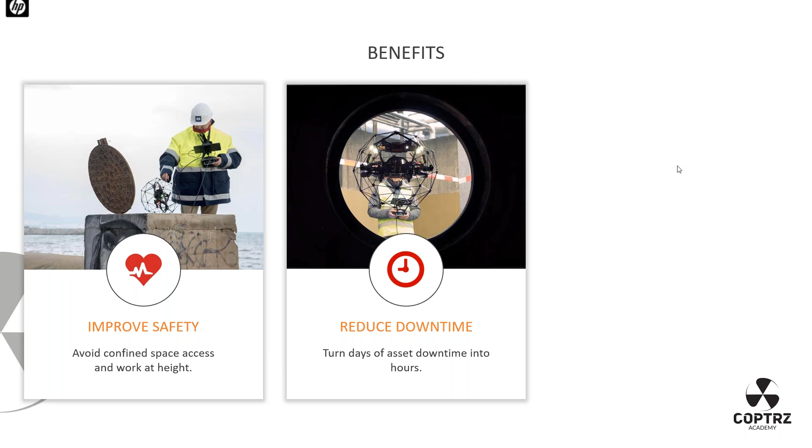So for all those of you trying to build a business case out there for this kind of technology, do not hesitate to reach out to myself or George. We have numbers, we can show them to you in terms of the case studies and how companies have benefited in terms of reduced downtime.

Last but certainly not least is the lower cost. Here we're not just talking about operating costs anymore, but we're talking about the capital expenditures related to things like scaffolding an entire boiler, for instance, or the inside of a chimney. Just think about that particular cost point. On top of that, you have to consider how much lower the premium on insurance risk would go if you can actually demonstrate that you don't need to put humans inside this confined space structure.

So it's really a trifecta of benefits that make this value proposition really universal inside a company, whether you're pitching it to the health and safety people, to the operations management people, or to the CFO.

Absolutely, I think especially in the current climate, companies are looking for cheaper, better alternatives, and safer is always the key point at the moment. So it really does hammer home that the lower cost, reduced downtime, and improved safety are key talking points for business cases.

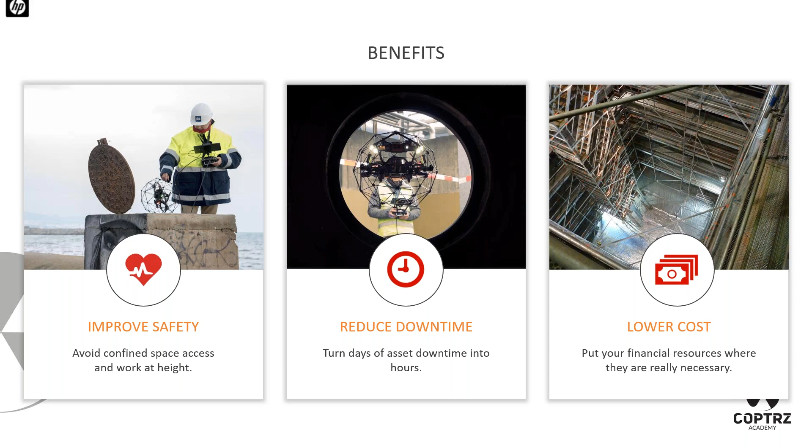I think you raised an excellent point, George. Especially with the price of crude, the WTI at these levels, companies must look into any possible means to reduce the cost of inspecting, for instance, storage tanks, assuming that there are any empty at this stage. And ELIOS has really become the go-to choice for a large number of refineries around the world. Absolutely.

So we've been working on this presentation for quite a while, and I still find the hierarchy of hazard controls to be the best way to explain the value of ELIOS. This is even more relevant, I think, when talking in a country like the United Kingdom, with common law and especially the duty of care concept, which is not something you find necessarily in all other legislation, but I'm sure all of you are familiar with it. It's such a neat and straightforward way to explain why this product is really a no-brainer when you start looking at it from a point of view of risks and risk management.

So I'm sure most of you are familiar with the inverted pyramid, and essentially you go from top to bottom, from the most effective to the least effective. If we can just move to the next slide, you will realize, and probably accept as a matter of fact, that the majority of confined spaces works at the moment only really rely on the bottom two elements to perform this kind of inspections.

So either change the way people work through new procedures - for instance, hot work permits or confined spaces entry permits - or really the only remedy that people have for avoiding dropped objects from a railing or from scaffolding is to use PPE. But that's just not enough, both in terms of the duty of care of the employer and in general, considering the technological alternatives that are out there. So suddenly, when we start thinking outside of these terms, outside of the status quo, outside of 'oh, but we've always done it this way' or 'the procedures dictate that we do it this way,' there are other options.

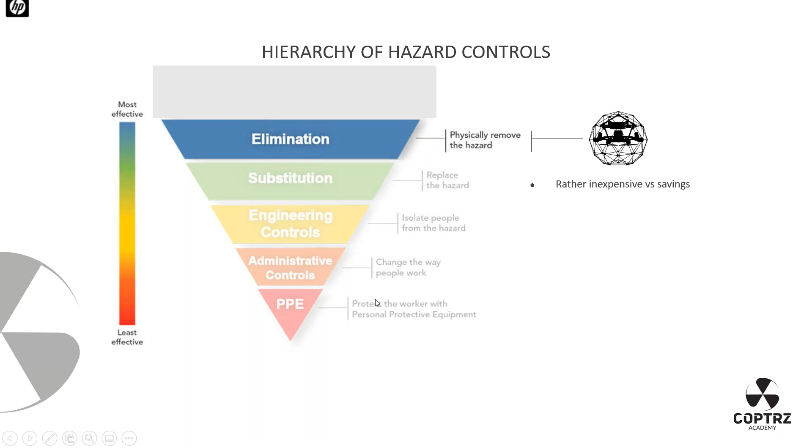So just some key points, and I think we will move on to some of the industries. Junior, if you just want to go through a couple of these, that'd be brilliant.

Thank you, George. Yes, so oil and gas - it's very much our bread and butter in the UK. It definitely represents the largest portion of the markets that we cover with Coptrz. I basically lived in Aberdeen for part of the year last year during the roadshow, and definitely we have some very big ambassadors in this industry, mostly from the point of view of inspection companies like RaptorUAS. We tend to work mostly as a tier 2 or tier 3 supplier, just because of the way the industry is structured through these layers of contractors and subcontractors. In no small part, thanks to the work of George and his team, we started to make strides also in power generation.

Surprisingly, not as much in nuclear, but more on the coal side of things. Nuclear power generation still remains a bit untouched from this kind of evolution or innovation in the UK, whereas, for instance, in Italy, which, as you might gather from my mild accent, is another one of my main markets, we work very closely with Enel, one of the largest power generation companies in the world, using this for boiler inspections inside coal-fired or gas turbines in gas generation. It's really become the state-of-the-art way of performing these inspections.

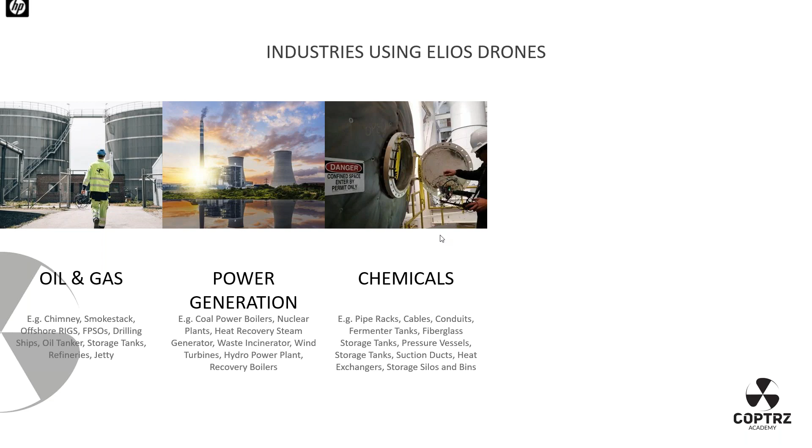Chemicals as well - this is one of our biggest success stories. I'm happy to go more into details later on this, but we essentially managed to turn Dow Chemical from a client to an investor. We became an integral part of their inspection processes, so much so that they actually bought shares in the company to guarantee the future R&D development of new products.

And chemicals in this case doesn't simply mean oil and gas. There's a ton of opportunities, I think, in the UK market for everything related, for instance, to pharma chemicals. And as far as mining is concerned, obviously, UK, maybe we're a couple of hundred years late on this particular part, but I'm sure there's still plenty of abandoned mines or mining operating equipment that could be safely inspected with this particular tool.

Last but not least, we've been very active also on the public safety sector. Obviously, most of these details are confidential, I just want to mention the inspection that we performed on the Liverpool Echo parking lot that burned down. This is available on our website, and it was the very first case that we know of a confined space drone used for a forensic investigation. I was the pilot on that mission, so I'm particularly proud of its outcome, and I encourage you to take a look at it on our website.

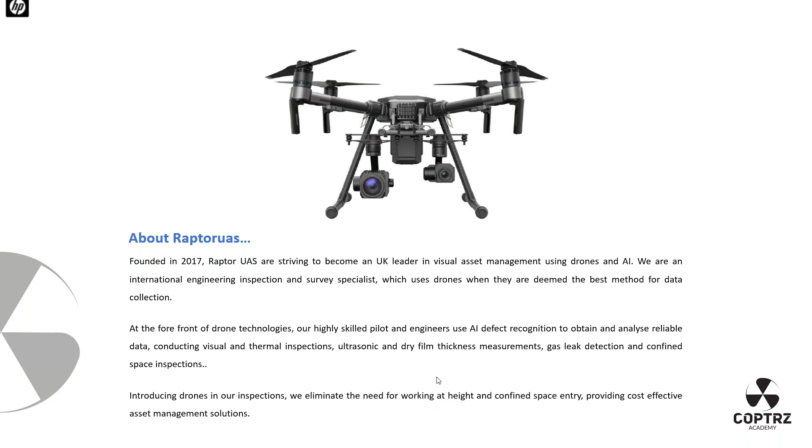Well, I think we have talked about it for cost-effective and safety before. Junior has done it, and also you, George, have mentioned it before. There is a very cost-effective solution to implement those inspections. We have seen about a 60%, depending on the situation, depending on the access, on the different scenarios or premises industries that we are working, but it's about a 60% compared to other access methods such as scaffolding, MEWPs, or rope access inspection.

We have a significant reduction of downtime. We do have a shorter setup and a much faster inspection. So as previously Junior has mentioned, we are talking about reducing inspections from weeks to days. So now anything that we have done, for example, inside tanks, instead of having to build a scaffold for access that will take a few weeks and then do the inspection itself, we are actually collecting all the data with the drone in a few hours on site, and that's done on site.

And after that, we have all the information available to go through and to analyze back at the office. We can perform also multiple assets in a single mobilization, and all this enhances condition monitoring of any assets.

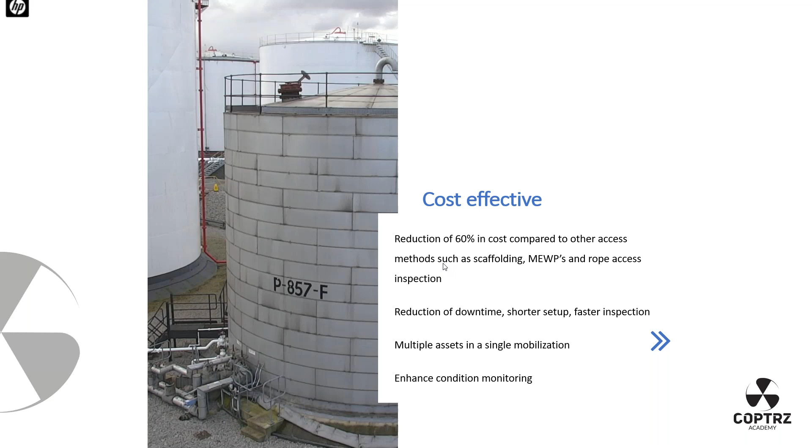From the safety point of view, we definitely reduce and eliminate the working at height needs, any works in scaffolds and rope access. It provides us that safe access to confined spaces, removing the need of confined space entry, and it also allows to maintain a standard distance from the asset.

In this case, for example, the ELIOS 2 was a great improvement from the ELIOS 1 because it has that feature of locking the distance from the asset, so it will never get any closer. And if you set your distance to 300 millimeters, it will just follow the inspection without actually getting in touch with any surface or any equipment that you are inspecting at that moment. So great tool, and great to also operate when there are other personnel or other work in progress.

Yeah, so just touching on that, Anna, the locking of the distances to keep you at a safe distance from what you're actually inspecting. How is that benefiting you for doing reliable, consistent data? Well, first, it makes the inspections much easier to fly, because as soon as you are on the area of concern or the inspection equipment or whatever you want to have a look at, it's much easier to just lock the distance and follow that element.

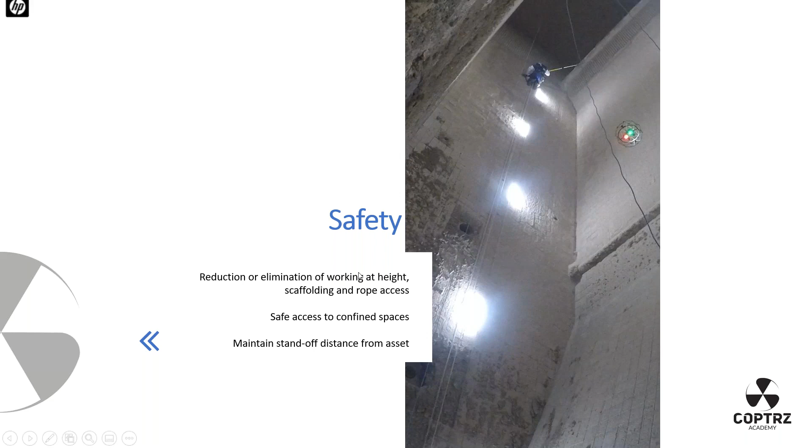So yeah, for tank inspection, I wanted to show how we are using the ELIOS and other drone platforms to carry out confined space inspections. All these photos were taken with the ELIOS 2. So they are on tanks, and we can do basically what I would classify as structural surveys, coating surveys, and

corrosion and insulation inspections. So for the structural surveys, we normally look for cracks, mechanical damages, misalignments, missing objects. During the inspection we mobilize two people as a minimum: a remote pilot who is just controlling the drone, and a person who is reviewing the data, the videos, at the same time. So if anything is flagged during the inspection, we can check it live, maybe do a close-up, or just have more images of

any areas of concern. However, we are still recording, and we have a permanent record which can be reviewed and analyzed afterwards, and provided to the client or any third party for further assessment. Then for coating surveys, we are normally checking for blistering, grades of corrosion or coating failures, and also heavy loss of material thickness, scaling, scabs and different forms of corrosion.

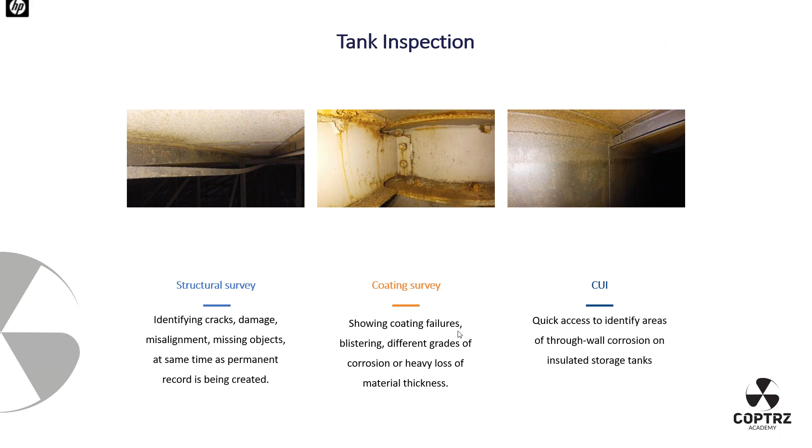For the ELIOS, particularly the ELIOS 2, there are different features that make it more appropriate for inspection in confined spaces. We have the oblique lighting. It was a big problem at the beginning with lighting, because dust in confined spaces doesn't allow you to see anything. That's now sorted on the ELIOS 2 - you can be in a very dusty environment and not see any dust at all, which is great.

On top of that, because of the oblique lighting, you also get some perception of 3D. So you can see details on pitting, defects and cracks, and perform a proper inspection just with the data you collect with the ELIOS 2.

You have 4K video. Most people are quite familiar with the USAF resolution chart - the ELIOS has 30 centimeters from the object, and it falls on element 1, group 1, which is actually a very good resolution. It allows you to check welds and perform welding inspection through the ELIOS.

As mentioned, it has up to 15 minutes flight time, probably about 12 minutes for a good inspection. The amount of data you collect is enormous - for a 35 meter diameter tank, it was about 96 gigabytes, and that's only for roof inspection. We didn't do anything else, just roof inspection, 96 gigabytes.

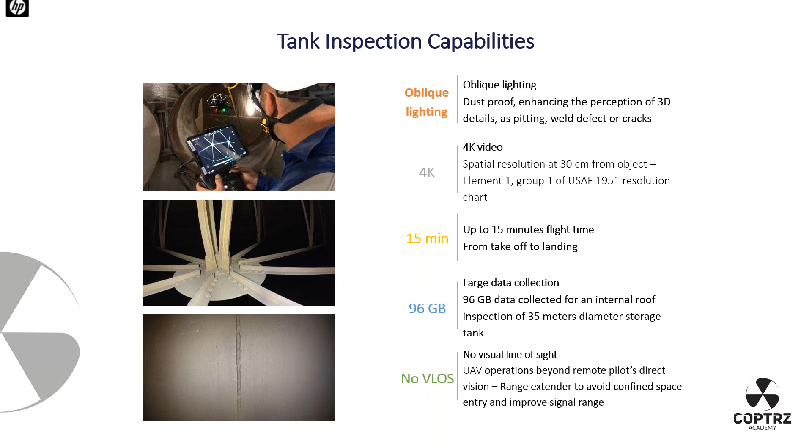Yeah, so for a structural survey, if you can, one more click.

As inspectors, we normally follow recognized international standards. In this case, ISO 17637, the standard for visual inspection of welds, already considers the use of mirrors, borescopes, optic fiber, or cameras when direct inspection is not possible. This brings the ELIOS and drone inspection in general into the picture, because sometimes the question is whether it's compliant to do an inspection with an ELIOS. Yes, it is, because it's already recognized in ISO standards.

The type of damages or findings we normally have on structural surveys are mainly corrosion, missing objects, or potential drop objects, as well as objects left from construction, which I always find funny or interesting, seeing something left there for 50 years and now having access to see it again.

I think we'll see some pictures on the next slide, and then kind of weld defects or other problems. This picture of the weld defect is not our picture, it's something I found very interesting, I think from marine structure inspections, who posted a video on LinkedIn showing a crack or crack-type indication on a weld.

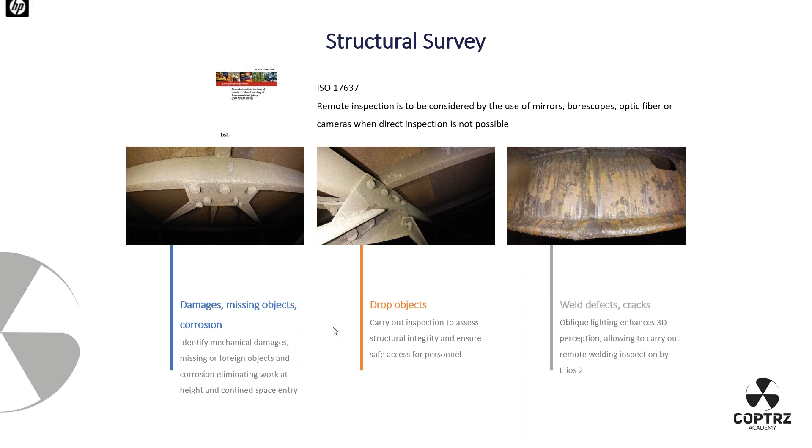Great, thanks. So for coating inspection, we are again doing exactly the same. Instead of direct vision, we are doing the same with drones.

ISO 4628 covers evaluation of degradation of coatings, and it has pictograms, the ones that appear on the bottom of the slide, that you use to compare your survey subject to those pictures, giving you a grading system of how much the coating has degraded, whether for rust, breakdown, or general coating failures.

So we use this together with dry film thickness inspection, and also with low and high voltage holiday detection. We've implemented DFT and holiday detection on our drones also for confined spaces, so we can carry out both types of inspection.

For dry film thickness, it's basically checking the remaining thickness of the coating. For those not familiar with low and high voltage holiday detection, it's basically checking if there are any holes in the coating system. If the coating system isn't closed, you'll always have corrosion developing under it, which is actually quite dangerous and problematic.

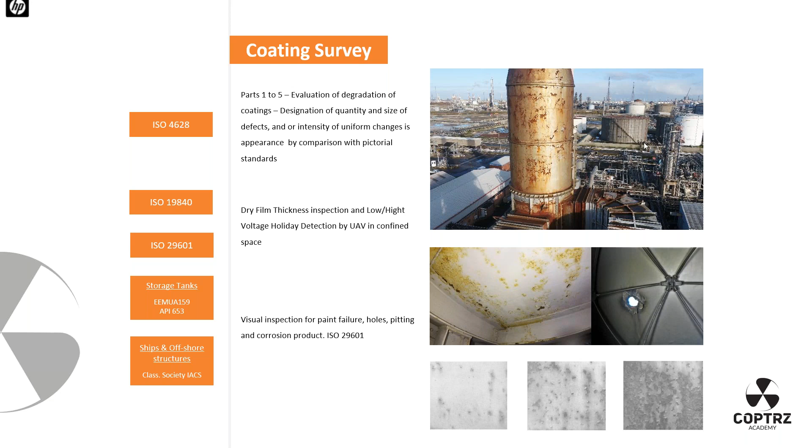Finally, for corrosion under insulation, as we've mentioned briefly before, sometimes clients don't know the condition under the insulation because there's no external access. When they perform an out-of-service inspection, they just want to assess if there are any integrity failures on the shell or the roof.

So what we're offering right now is a combination of different inspection techniques. Thermal inspection can be performed beforehand, while the tank is still in service, to detect any possible water ingress or areas of insulation damage, which are highlighted. Then a further inspection is carried out on those areas of concern.

Once the tank is out of service, a visual inspection can be performed with the ELIOS, covering not only the shell but also the roof structure and any roof plates, along with ultrasonic thickness measurements done both internally and externally on the tank.

Together, this full package offers quick, safe access and doesn't require confined space entry, allowing the client to make informed decisions and schedule maintenance appropriately.

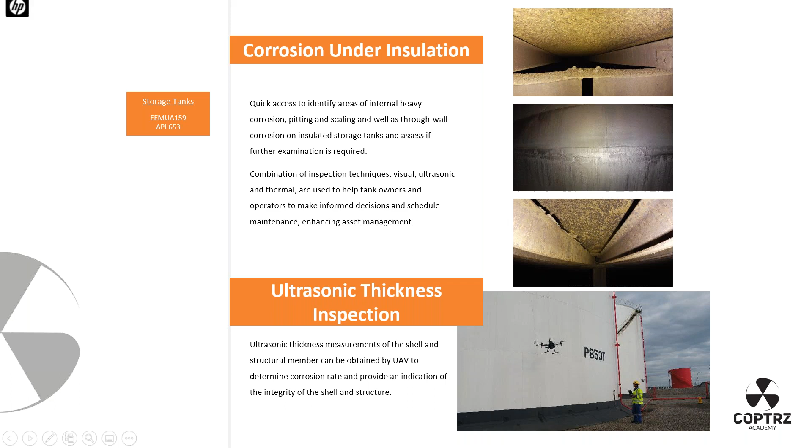This is a tank roof inspection case study. The tank was a 34-meter diameter tank commissioned in 1962. The owner reported some sagging on roof plates, and they had never carried out a roof inspection before, nor had any traceability of previous inspections performed.

As we were already doing drone inspections and the client was trying to introduce drones into routine inspections, they decided to go for an ELIOS internal inspection to assess the condition and check if they needed any further investigation.

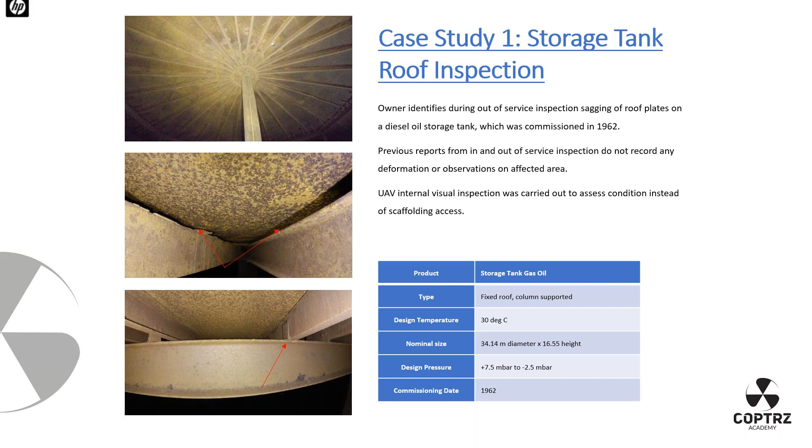So we entered the tank, and what we found - if you can go to the next slide, sorry - were some misalignments, some bolted connections that were actually not bolted, missing fasteners, but there were no problems in the area of concern.

It was just the roof rafter - instead of being connected to the fixing port as it was supposed to, it was simply resting on the ring. So they closed that inspection concern and noted that the structure of the roof is sound, and they can continue operation and bring the tank back into service.

We also found foreign objects, which I mentioned before - it's always interesting and funny when we get in there and see wedges, ropes, or bolts that have been left behind and can now be seen. Most of the time I'd assume that if they couldn't remove it, they said 'just leave it, it doesn't harm anyone.' In most cases we haven't seen them pose a drop object hazard, so they can just be left there.

But at least there's an assessment of the condition of the roof structure, and if there is any real concern, then actions can be taken.

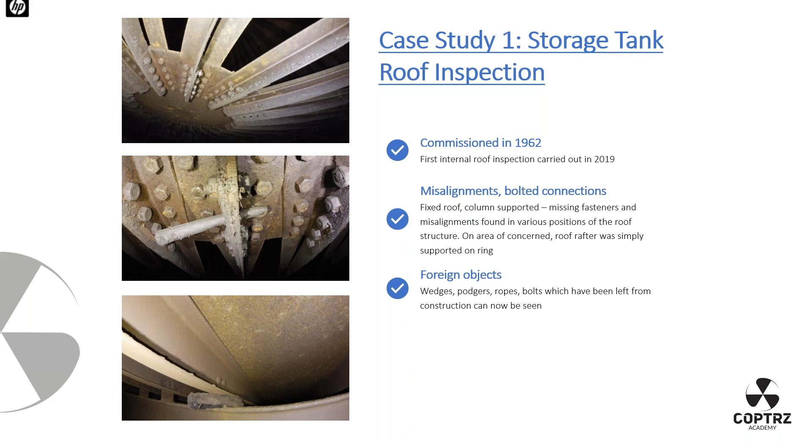For this tank, we had an 80% reduction in confined space entry. We accessed the tank ourselves, but there was no need for scaffolders or inspectors to enter. So it was an 80% reduction in personnel needing confined space entry, and a 90% reduction in timescale.

Instead of building scaffolding and doing a full inspection that would take weeks, we completed a full inspection in a single mobilization within 8 hours, and processed the images afterwards - an 80% reduction in cost. Together with that comes a definite reduction in the timescale for the out-of-service inspection, so the client can get their tank back in operation as soon as possible.

Also important, not only for us but for most of our clients, is compliance. The inspection was performed and the data was analyzed by a certified EEMUA 159 tank assessor.

So at Raptor, we understand that drone inspections aren't only about going there, doing the inspection, and collecting the video and images, but also about analyzing and interpreting the data we collect to offer our clients a solution, not just the problem.

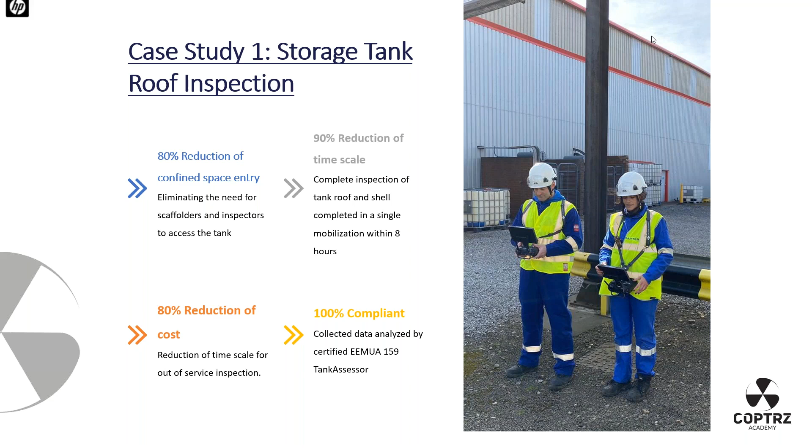For the second case study, this is a high temperature storage tank. The client already knew that they had a problem with leakage on the tank shell. So what we offered again was a thermographic inspection, only to assess any areas of concern regarding water ingress or insulation damage.

We performed a confined space inspection, full internal of the shell tank, roof structure and the roof, just to assess any corrosion, integrity, and any wall-through damages. And finally, we did our ultrasonic thickness measurement on the shell.

So they didn't need to remove all the insulation, only on those areas of concern. And with the thickness readings, they are able to calculate the remaining life of the tank, and therefore they can make informed decisions on how they are going to carry out the inspections in the best way.

I have to mention about the background photo - we are using the ELIOS now also outside for inspections on areas that are not very accessible, and it's actually a great advantage. We are doing it mostly for wind girders or any structural elements outside on the tanks, or other structures, even for pipe runs - I would say it would be the alternative. It's not very comfortable to do the inspections on those areas, so the drone is a great solution, very quick, and the data acquired is just fantastic.

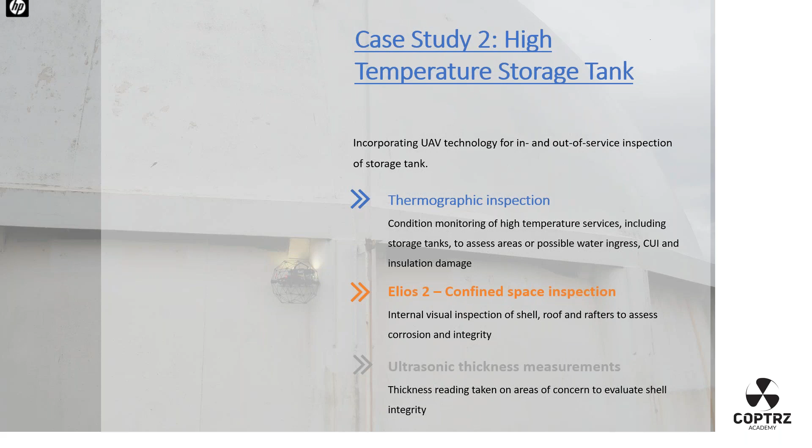Brilliant. Thanks for going through that. So going on, we have got, yeah.

For case study two, the high temperature storage tank, it's a safe solution because we eliminated working at height and confined space entry. It's a quick option instead of doing scaffold or conventional access. We completed the scope of work in 3 days on site, and all the data was available 48 hours after the inspection. It's a very cost-effective solution.

We can perform multiple scopes and multiple assets in one single mobilization, and we collect all the data to define and build a maintenance strategy and a scope of work that reflects how the asset actually looks. The data is also permanently recorded and can be made available for any client or third party to review afterwards.

Fantastic, great workflow from capturing the data to processing it to presenting it to your client. A 48-hour turnaround is very quick.

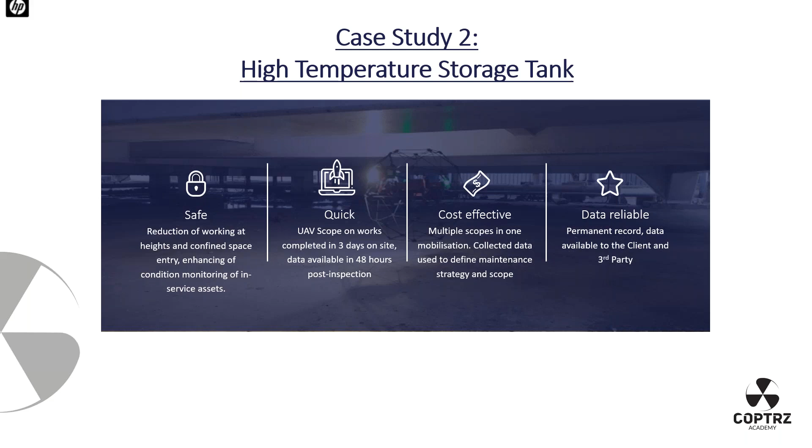This is just for compliance, as I mentioned before, something most of our clients have a high focus on. How Raptor conducts business is we make sure our camera, remote pilot and camera operator have the relevant qualifications and training. We also have inspectors certified as EEMUA 159 or API 653 or Classification Society recognized specialists to perform the inspections, plus qualified engineers who review and assess the data, as well as certified inspectors who, with their experience, can provide further input to clients and give the best recommendations.

Just going back to compliance, a question from myself: how do you present your data? What's the workflow for that? Is there a specific compliance requirement you have to follow, or is it just a report at the end of the day? It depends.

It depends on what you are looking for, and on the industry or sector you are working in. For tank industry or tank farms, you need to follow EEMUA 159 or API 653, whatever the client has in their guidelines, or even government regulations -- it's not a government regulation in the UK, but I know there are government regulations written into law in different countries.

Depending on that, you analyze all the visual data and point out any areas of concern, or if there are none, you present that this is fine -- these are the photos of your asset and we haven't observed any problems.

If there are particular areas of concern, we point out the problematic part and show what we have seen. The workflow really depends on the industry -- sometimes we need to build models, so we collect the data, go through the point cloud, and create a 3D model to analyze, for example for measuring. With the ELIOS it's similar, but without entering the model, to measure cracks, assess areas, or measure length as needed. It really depends on the industry, the data, and what the client is looking for.

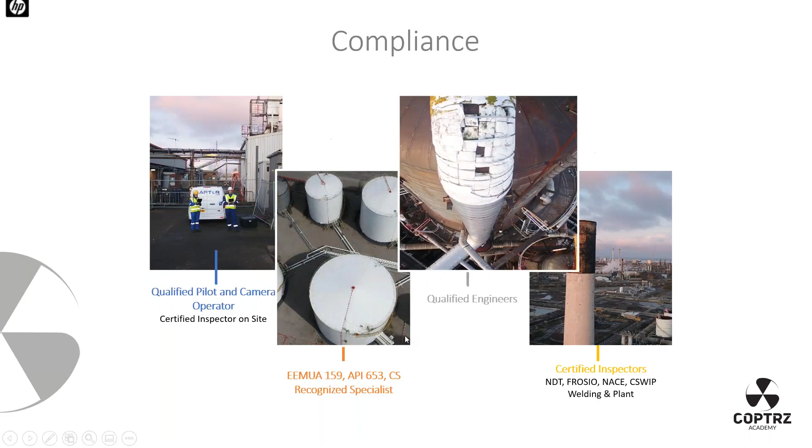And I recently spoke to the largest refinery in the Mediterranean, which is very conveniently placed just a few kilometers from where I grew up in Sardinia. And essentially they told me that as far as they're concerned, they do not even use hot work permit. They just use normal permits that they would use to perform confined inspections work. So I've done inspections in Germany where instead of having any sort of intrinsically safe ATEX environment, you just needed a hot work permit, pretty much as if you were doing a sort of welding fixing.

But again, we're still at the phase of the technology where the asset needs to be fitted to receive the technology and not the other way around. But I would appreciate Anna's comments on this, because I think she's been in way more refineries than I have, and she's way more familiar with this particular issue than I am.

Yeah, well, from our point of view, working on refineries or tank farms, basically we just follow the hot work permit system. And for confined space entry, you still need the tank cleaned up to a point, because you cannot inspect anything if it's just full of oil or very, very dirty. The sensors will not work, the drone will not work, the data that you are getting will be terrible. So there is definitely no point in doing that. So in the end, we haven't seen any restrictions on how we are using the drone.